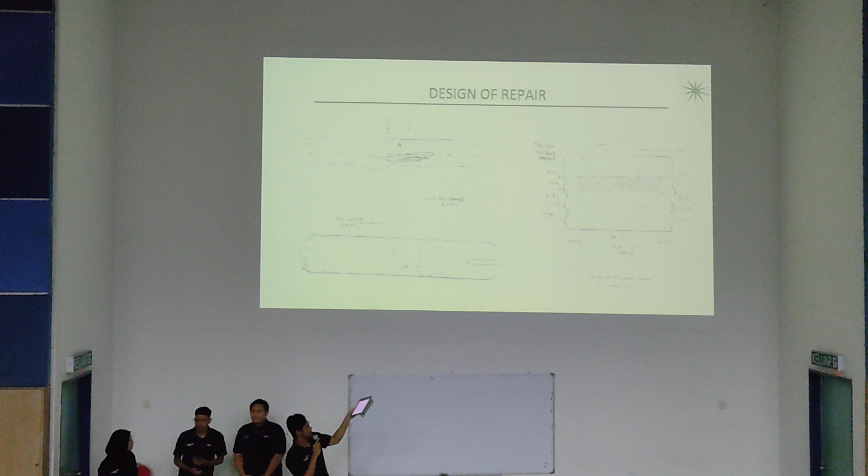Okay, this is the design of repair for the patch for the skin that we have removed. This is the local view and global view, and that's the location for the hole that we will cover. Okay, next.

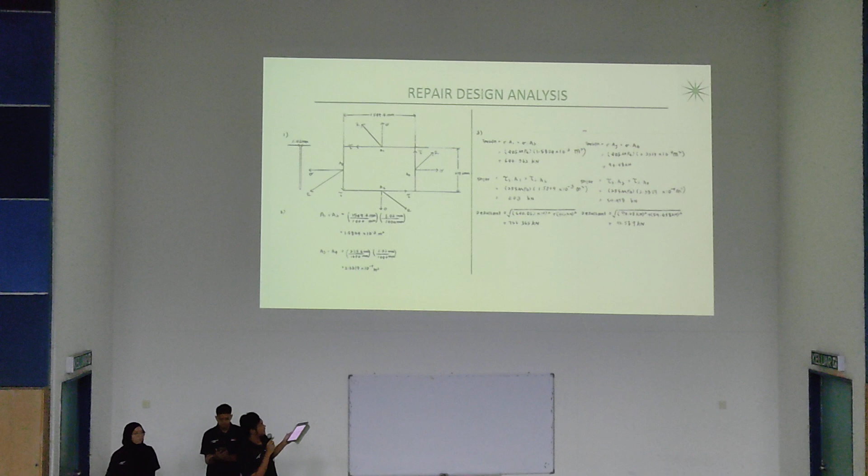This is the dimension for the hole that we will patch up, and this is the calculation for the load loss. As we see, there are 4 areas, and the length and width for A1 and A2 are the length times the thickness, and for A3 and A4 it is the width times the thickness of the skin, which is 1 millimeter. Then when we come up with the area for A1 to A4, we will multiply with the FTU and the FSU. Okay, next.

This is the calculation for our doubler strength for A1 and A2. We calculate the length minus the rivet diameter. We try to make it 80 per row for the test, using the rule of thumb from 1.0 for the skin, and the doubler is 1.2 millimeter for the thickness of the doubler. After we calculate the area for the doubler at A1, A2, A3 and A4, we multiply by the FTU and the FSU. After that, we come up with the resultant force for the doubler strength.

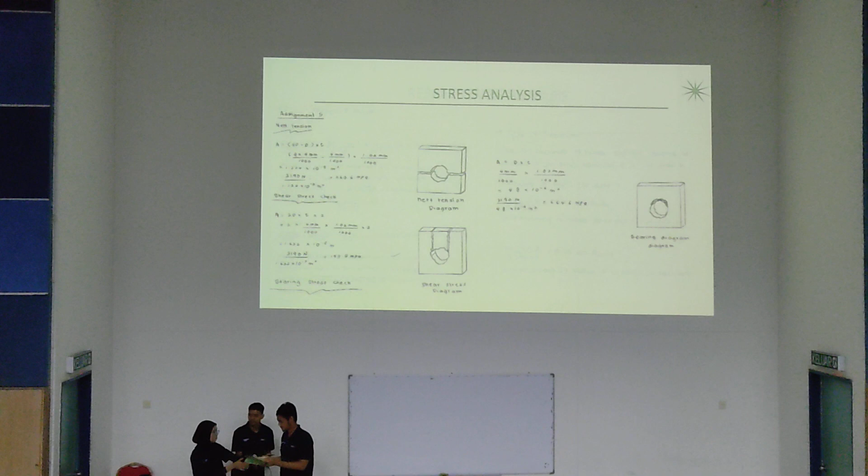Bismillah. Okay, I will continue the presentation about stress analysis. In this session we find 3 things: tension, shear stress check, and bearing stress check.

The key point for this session is we want to find out how much stress we can apply to our component or material. For net tension, we must refer to our rivet diameter, which is 4 mm, and we take the value 3190 Newton. So we will divide by our shear area that we are looking for. Okay, so we find the value of net tension, which is 260.6 megapascal.

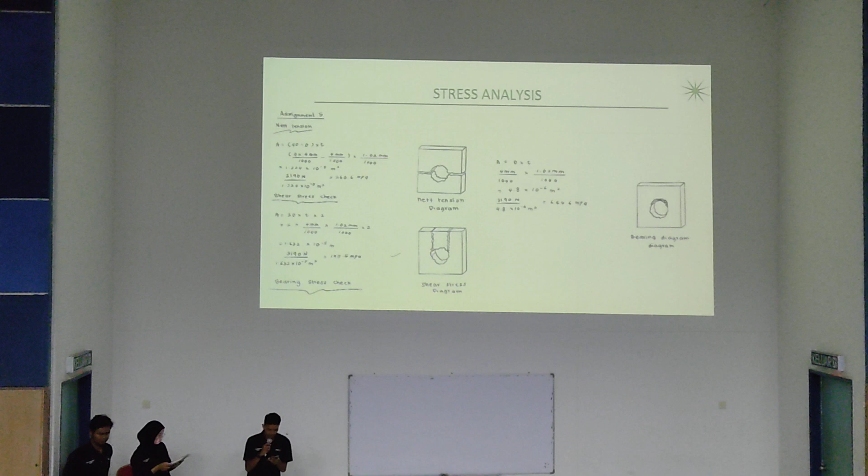Shear stress check value is 195.5 megapascal, and bearing stress check is 664.6 megapascal. Okay, next, for stress summary, we want to find the margin of safety for each analysis.

For shear out, we find the margin of safety is 1.3. So the shear out margin of safety of 1.3 indicates that the structure or component has a reasonable safety margin because the value is more than 1.

Furthermore, for net tension the value is also more than 1, which is 1.6, so the structure component is designed with a significant safety factor against tensile failure. Last but not least, bearing is 1.1. Even though this is the lowest value, it's still more than 1, so the factor of safety is good.

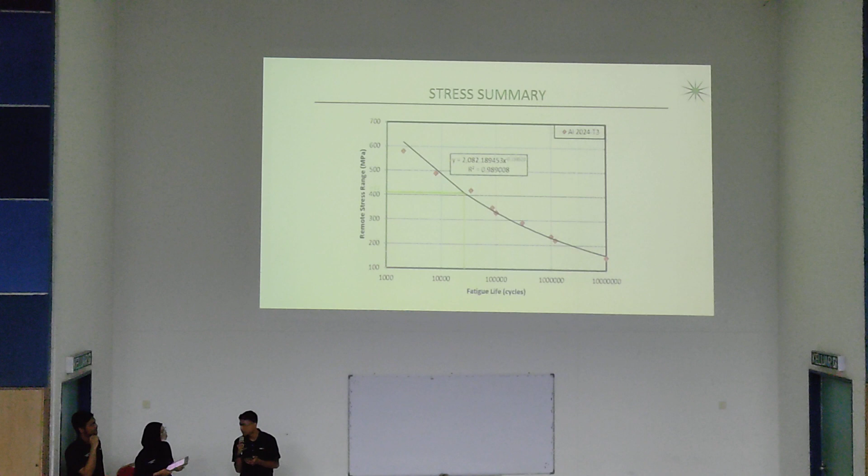Okay, next, for the graph of fatigue life cycles, we refer to the table of thickness at 405 megapascal, and we draw a vertical line on the x-axis, and we find the value of fatigue life cycle, which is around 20,000. Okay, next.

Okay, so I will continue the presentation, which will be the repair instruction. The repair instruction consists of 4 steps: inspection, remove damage, fabricate repair materials, and the last one is installation.

So basically, during the inspection, we would do a very detailed visual inspection to assess the extent of the damage. After that, we will conduct non-destructive testing, such as ultrasonic or eddy current inspection, to detect hidden or subsurface damage.

For the second step, remove damage, the extent of the damage was determined according to the guideline in the general repair section. The damaged section of the aircraft was cut off to ensure a clean and precise cut, and all sharp edges and burrs around the cuts were removed to ensure a smooth surface.

The third step will be fabricate repair materials. So the most important thing when fabricating the repair materials is that they must be 100% the same as the original materials. So if we are using alloy 2024 aluminum, we must fabricate the same material for the doubler. So next.

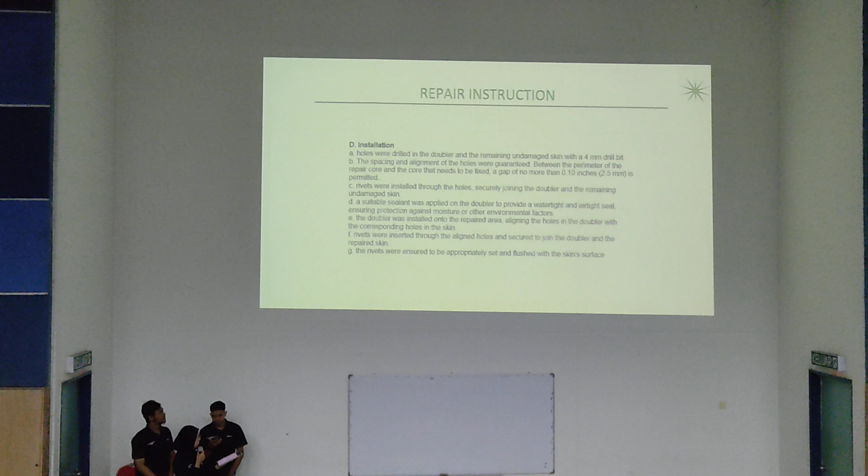For the installation, first the holes were drilled in the doubler and the remaining undamaged skin with a 4mm drill bit. After the holes were drilled, we will allow spacing and alignment between the perimeter of the repair core and the core that needs to be fixed, with a gap no more than 0.1 inches. After that we will install rivets.

To securely join the doubler, we will apply sealant to provide a watertight and airtight seal. After the doubler was installed, we aligned the holes in the doubler with corresponding holes in the skin. Rivets were inserted through the aligned holes and securely joined the doubler and repair skin. Last but not least, the rivets were ensured to be appropriately set and flush with the skin surface.

So the last one would be the certifications of personnel. Each personnel was assigned their own tasks. For example, Zul Hakim will carry out detailed visual inspection and design the doubler, and I will do the installation of fillers and doublers, while Aslam would calculate the suitable thickness and fabricate repair materials, and lastly Fakrullah would do the installation of rivets and make calculations.

I think that's all for my group. Thank you.

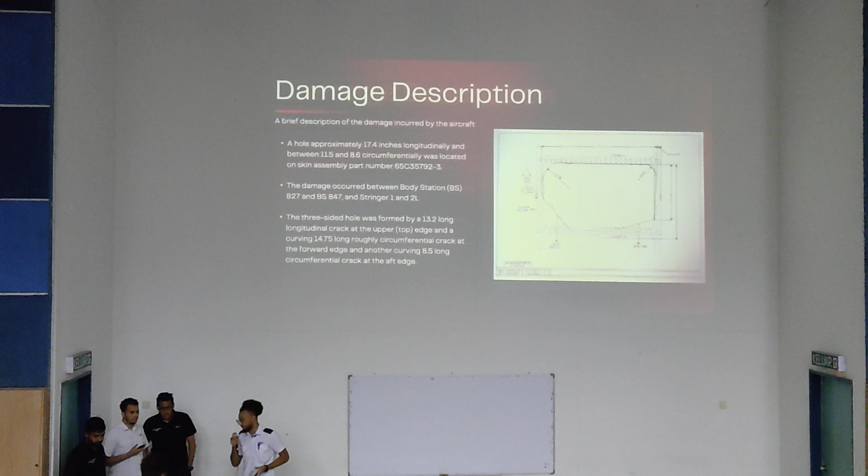My name is Anas, and today I will talk about the design repair. We will estimate this as the skin of the aircraft, and this rectangular shape we use for the cutting, and after the cutting we will install the doubler fit.

First of all we need to determine the material specification. For the material specification we will use aluminum 2024-T3, and we will use the same material for the doubler.

After finding the material specification, we need to find the material allowable values. We need to determine the area for each side. We have 4 sides. Our thickness for the skin was 0.9 millimeter, so according to the manual, we need to use the doubler at 1 millimeter thickness.

After finding the material allowable values, we need to find the skin area. To find the skin area, we take the length multiplied by the thickness. We need to determine the area for all 4 parts, and then we need to find the tension load loss.

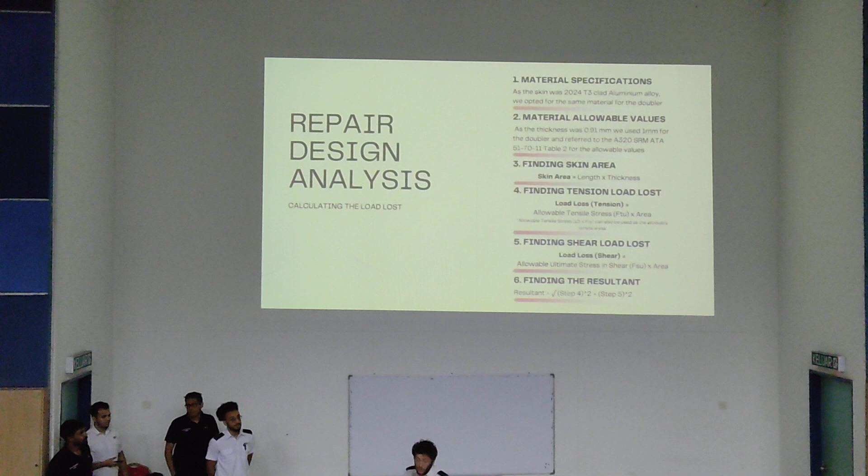In order to find the tension load loss, we use the allowable tensile stress multiplied by the area. We refer to the table for aluminum 2024 and found the FTU equivalent to 400 megapascal, which we used to calculate the tension load loss. Next we find the shear load loss using the same table for the ultimate shear stress FSU multiplied by the area. Then we find the resultant force, and since we have 4 areas, we multiply it by 2.

All the calculations were mentioned in our report, which we will show you after we finish this presentation.

Next slide, please. After this, we need to calculate the number of rivets used. By referring to the table, we decided to use the MS20470DD rivet, which is 4 millimeters in thickness.

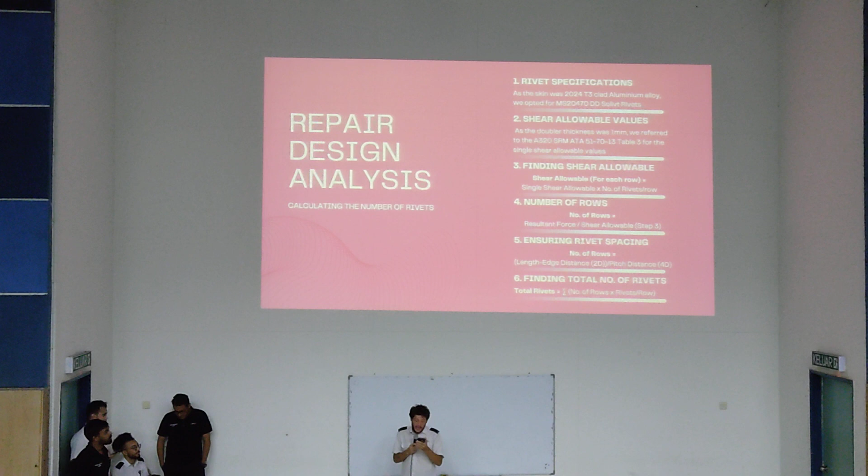After that, we need to find the shear allowable value, which is the single shear allowable multiplied by the number of rivets. To find the shear allowable, we referred to the rivet specification, and our shear allowable value for each rivet was 3190 Newton, multiplied by the number of rows, with each number of rivets per row equivalent to 3. After that, we need to find the number of rows and the rivet spacing.

After that, we need to stick the rivet on the doubler, so we need to find the doubler strength.

Next slide, please. In order to find the doubler strength, we follow this rule to find the material allowable value, find the skin, and find the area for the doubler, which is the length multiplied by the thickness. We need to find the tension load loss, the shear load loss, and the resultant, same as the skin.

After we find the doubler strength and the load loss, we need to calculate the margin of safety. Next slide, please.

The margin of safety is equivalent to the doubler strength over the load loss. Our first calculation found that if we use the same material as the skin, the margin of safety will be equivalent to 0.845, which is less - meaning the load cannot be transferred through the doubler, and it's not safe. That's why we need to make another calculation using a different material, which is AISI.

We did the same calculation for the stainless steel AISI and found the margin of safety equivalent to 1.54, which is safe to fly according to the manual. That's all for my part. I would like to pass to my colleague to explain more about this part.

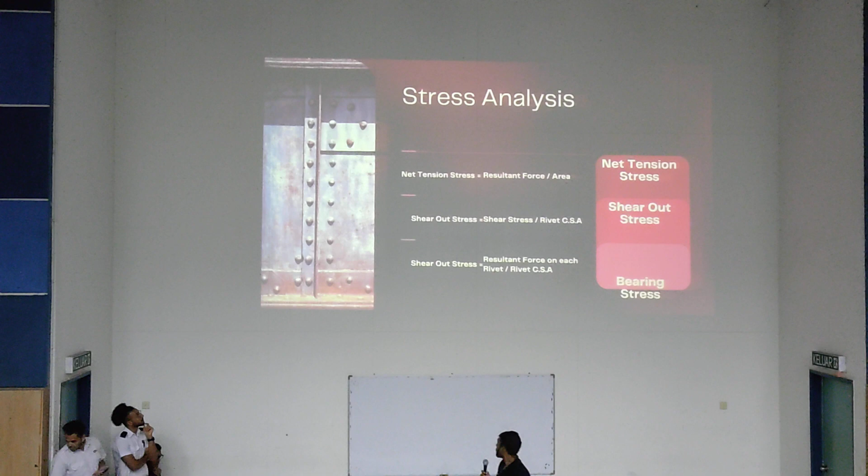Here are the values we got from our stress analysis. As you can see, the shear out and net tension stress are in reasonable margins of safety. However, the net tension stress is a bit lower than the recommended industry amount.

When it comes to bearing stress, it's only 1.09, which is not suitable, as any abnormal loads on the rivets would cause them to shear. So we believe the factor of safety is not complied with in the bearing stress nor the net tension stress. Next slide - I'll pass on to my friend for this part.

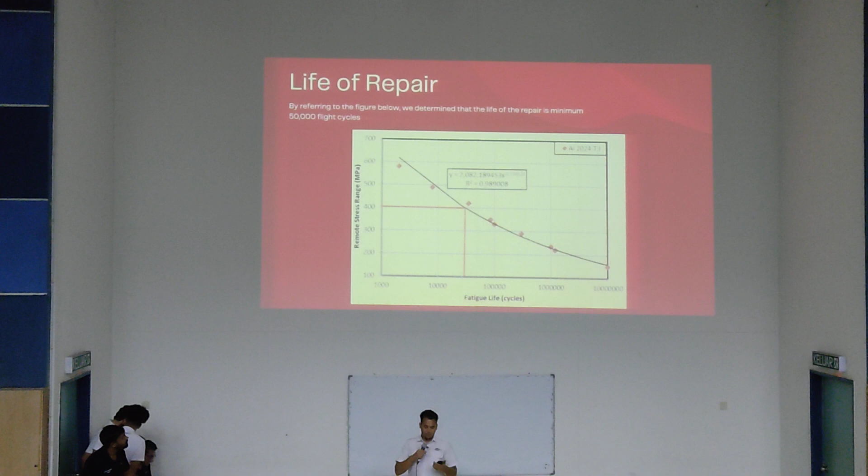In this part, we need to determine the possible lifetime or fatigue life. We have this graph showing the relation between stress and fatigue life. First, the maximum stress will be 400 megapascal, determined by the material table we used. From the graph, it is determined that the fatigue life cycle is 50,000 cycles. Thank you, I will pass to my friend.

Assalamu alaikum. Now we have inspection of the damage area. First, visual inspection: we check the area around the damaged areas for any signs of corrosion, cracks, deformation, or other types of damage. Second, marking defects: if any notable defects were found, we mark the area.

NDT inspection: once the part is removed, we send it for high magnification optical viewing to gain a better scope of the damage caused to the area and its vicinity. Fourth, measuring damage scope: the damaged part is measured and a sketch is made to determine the size of the cut on the damaged area.

Next, removing the damaged part area. Cleaning damaged area: before conducting removal of the damaged area, we clean the area around it of dust or other contaminants. Determine cut type: we opted to go for a rectangular cut of 24 by 14 on the damaged area.

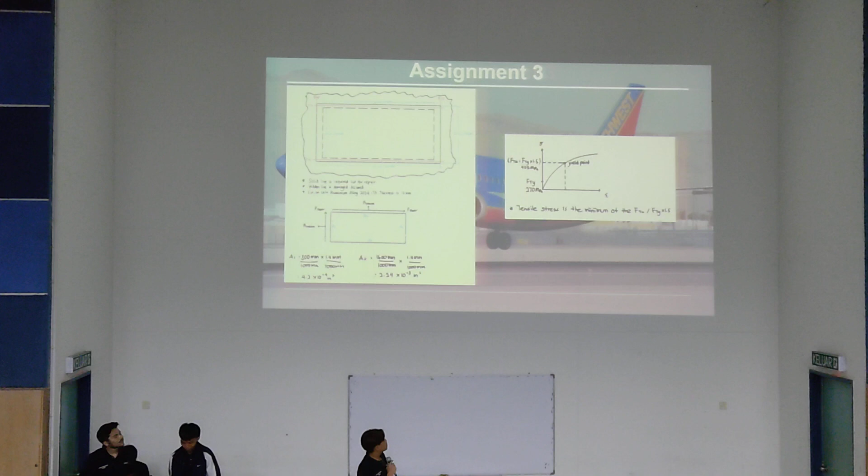Okay, next we need to find load carrying capacity loss. The reason we need to find it is to know the doubler, how much load the doubler we need to make at that part. So the formula is F equal to sigma A.

So we substitute, first we need to find tension. We substitute tension 405 times by 4.2, 10 to the power of -4.

Then we find the shear, and then we find the resultant for the area A1 and A2. After that we do the same at area A3 and A4. So from this load carrying capacity loss, we can make a doubler.

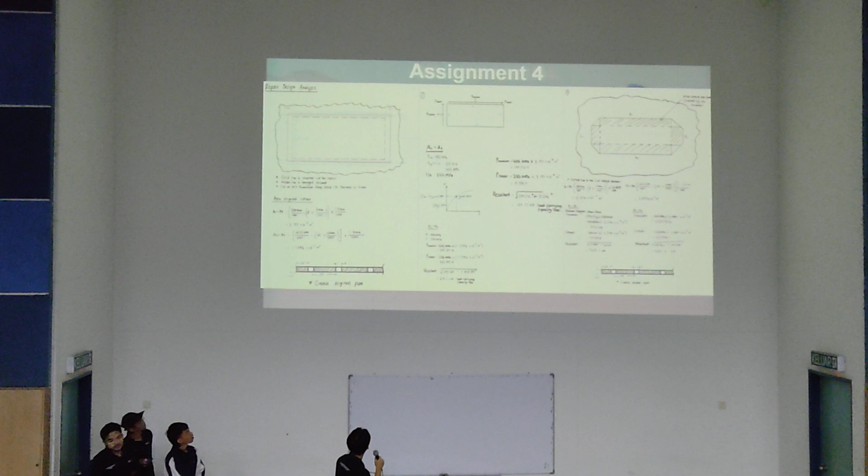Okay, so stress analysis is to analyze the rivets, how much force is needed for this kind of damage to occur.

So there are three stresses: net section tension, shear out, and bearing. For net section tension we get 169.83 megapascal. For shear out we get 76.14 megapascal, and for bearing we get 304.6 megapascal.

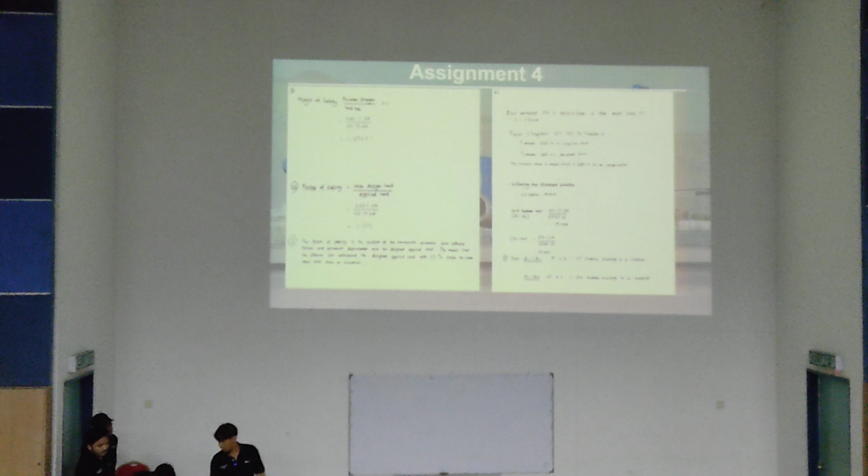And then the next is the material. We can refer to item number 4 in the report, which states that the material of the skin is aluminium alloy 2024.

And last is the proof of strength, which can be found in the stress analysis that has been searched by Shahmi in the report. Next, I'll pass to Ahmad Arman.

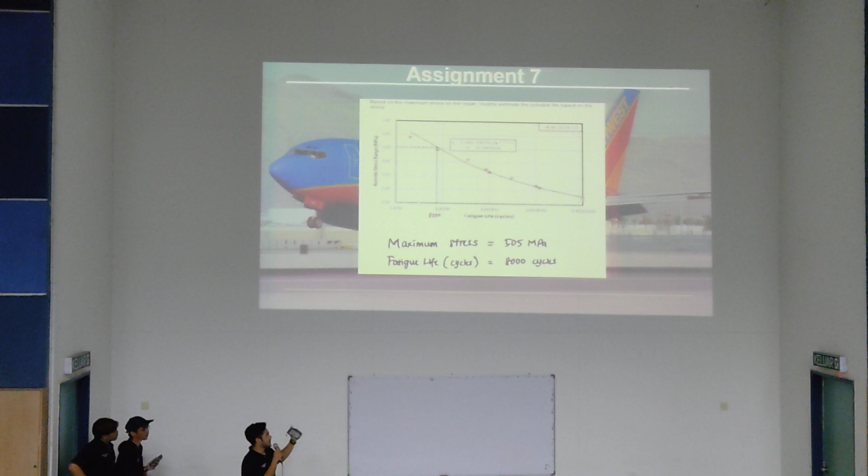Okay, as we can see in this graph, our maximum stress is 505 megapascal. So we found that our fatigue life cycle is 8,000 cycles. This indicates that the material can endure a repetitive stress ranging from the minimum to the highest, which is 505 megapascal. Approximately, it can undergo 8,000 cycles more until its failure.

This stress summary indicates whether our skin can withstand the stress or not. First we find shear out. As we calculate the shear out stress, we get 3.35, which is above 1, so our skin can withstand the shear out.

The second one is net tension. As we calculate, it's found to be 2.38, which is more than 1, so it can withstand the tension failure.

And the last one is bearing stress. We calculated that the bearing stress is 1.66, which is more than 1, so it can withstand the bearing failure. I think that's all for me, I pass it to...

For assignment 9, we need to repair the damage. Here there are 4 steps to repair the damage.

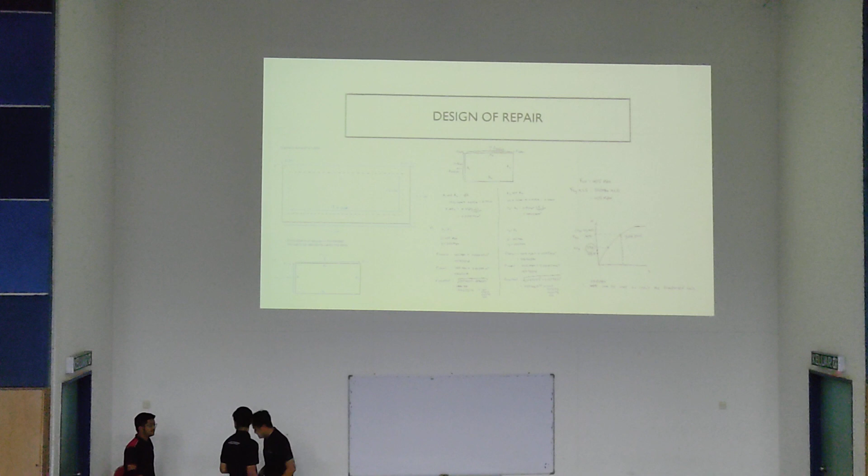Bismillahirrahmanirrahim. Assalamualaikum and a very good evening to everyone. So, on the left side of the PowerPoint slide is the damage of the aircraft, where the hidden line represents the damage and the solid line represents the cut that we have made for the repair.

The dimension of the damage is 11.5 inches by 17.4 inches, and our repair is bigger than that, which is 15.5 inches by 21.4 inches.

On the middle part of the slide, we want to find the load carrying capacity that is lost. From table 2 of A320 SRM ETA 51-70-11, we get the tensile and shear values, which are 405 MPa and 255 MPa.

Based on those numbers, we want to find the tension, shear and resultant, where the resultant is the amount of load carrying capacity that is lost. To get the resultant, we combine the tension and shear, which is the square root of tension squared plus shear squared. That is for A1 and A3. The next step is to repeat the same process for A2 and A4.

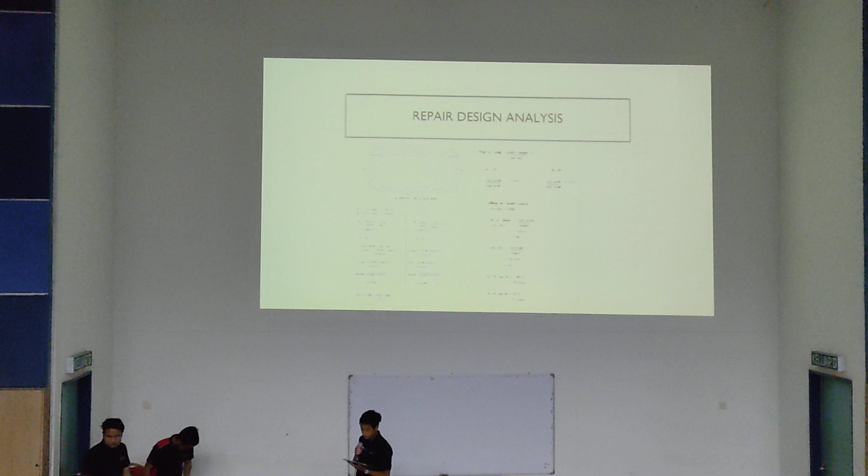So by following the standard practice of 3 times 3,660, we get the amount of rivets. Now for number of fastener is 300.93 kilonewton divided by 10,980 newton, so we get 28. Now for A2 and A4 is 416.56 kilonewton divided by 10,980 newton, so we get 37.

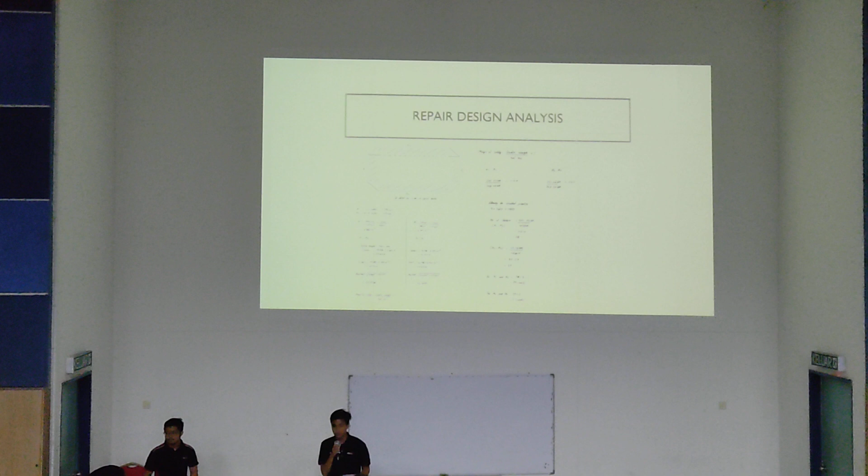To determine the amount of rivets required, we take those two answers and times by 3. So for example, A1 and A3 is 28 times 3, so we get 84 rivets. And for A2 and A4 is 37 times 3, so we get 111 rivets.

Now I pass the mic to Ivan Zikri for the next slide.

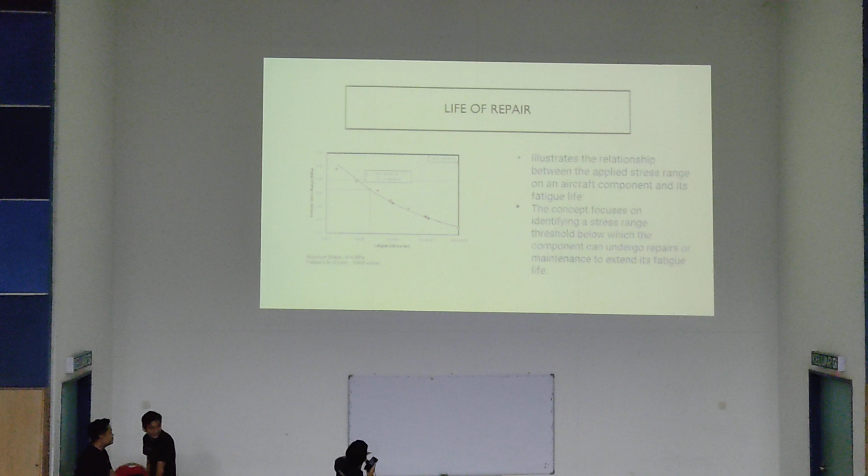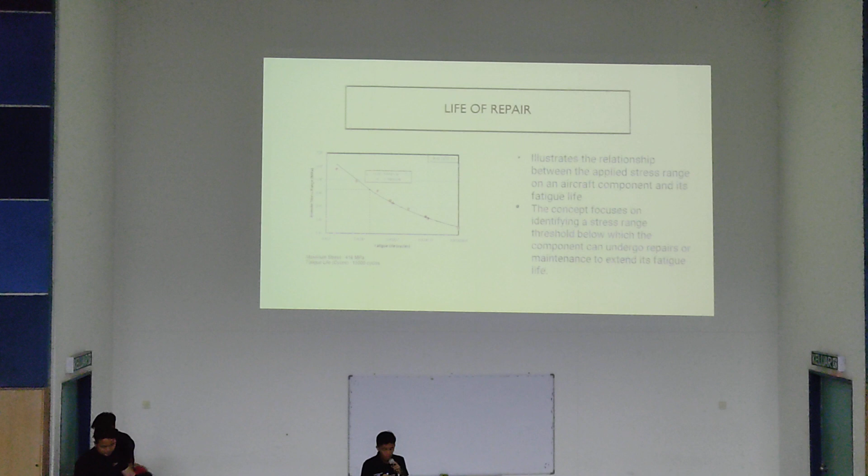On the graph, you can see the remote stress range versus the fatigue life cycle. This illustrates the stress on the aircraft and the fatigue life cycle, presenting data on stress from a certain part of the aircraft. Life of repair focuses on the stress range threshold of a component that can undergo repair and maintenance to extend its fatigue life. By analyzing this graph, one can determine the critical stress of a certain part, which can maximize the operational lifespan of the aircraft. As you can see, the maximum stress of the part is 416 megapascal, and the effective life cycle is 1,500,000 cycles.

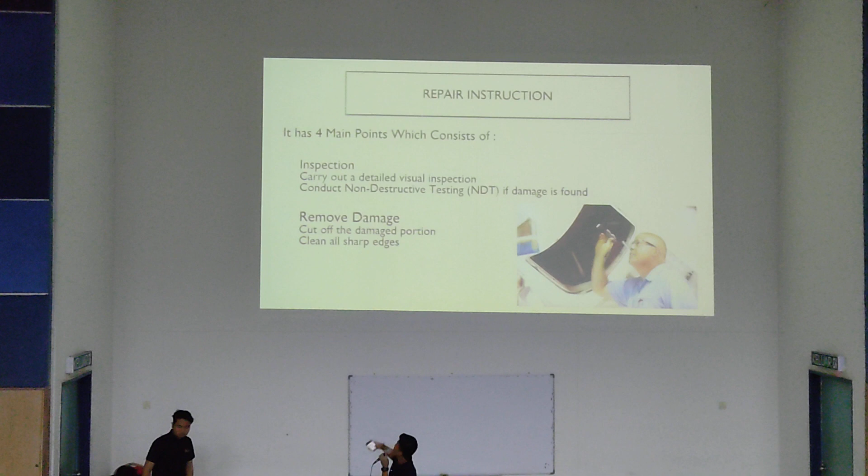Then moving on to the next point: remove the damage. First, we have to cut off the damaged portion using the correct tools, making sure the cut is clean. After cutting the damaged portion, we have to clean all the sharp edges using files or sandpaper to smoothen the edges. Next.

Alright, on the third point, fabricate repair materials. We have 2 steps. First, we have to prepare the fiberglass filler material, following the steps provided by the manufacturer and using appropriate protection like gloves or goggles when handling the filler material.

For the part of fabricate the doubler, we have to determine the size, shape, and material for the doubler based on the structural design and repair specifications.

The last one is about installation. Installation has 4 parts: drill holes of the appropriate size, install rivet or the fastener, apply sealant on the doubler, and install the doubler.

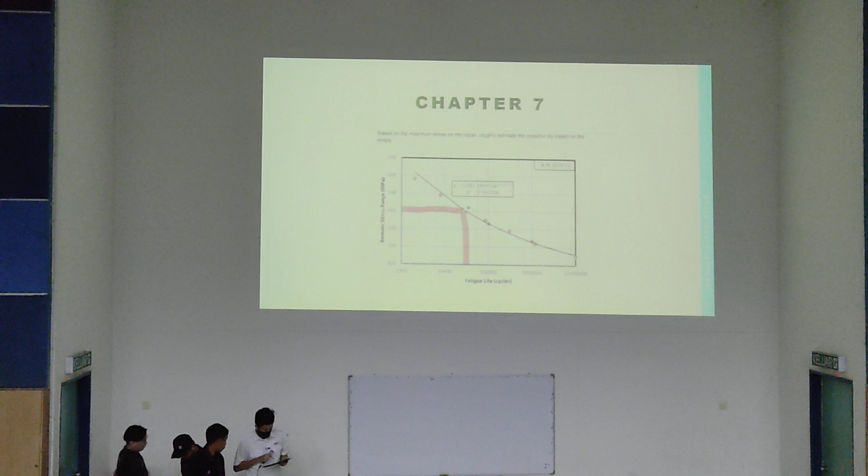Okay, next. For the next part, this is based on the maximum stress of repair and roughly estimating possible life based on stress. We got this from our calculation first, and then next.

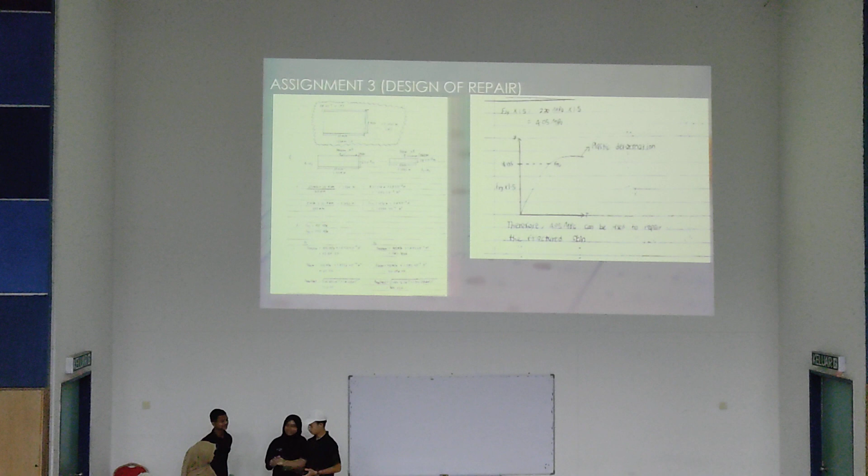Okay, next is design of repair. For our case, the damage dimension is 60 inch in length and 8 inch in width. So the first step, we calculate the area. The first area we calculate is the front view which is the length, and the second one is the width, which is 8 inch, and then we get the area.

The first area is 1.2192 times 10 to the power of negative 3 meter square, and the second one is 1.6256 times 10 to the power of negative 4 meter square. And then the second step, we calculate the force.

We use the formula which is stress times area, which is the area we calculated from the first step. The stress we derive by referring to the table in the maintenance manual, which is based on the thickness of the skin. For our case, the thickness of the skin is 0.8 millimetre, and therefore the FTU is 405 megapascal, and FSU is 255 megapascal. And then we calculate the resultant force.

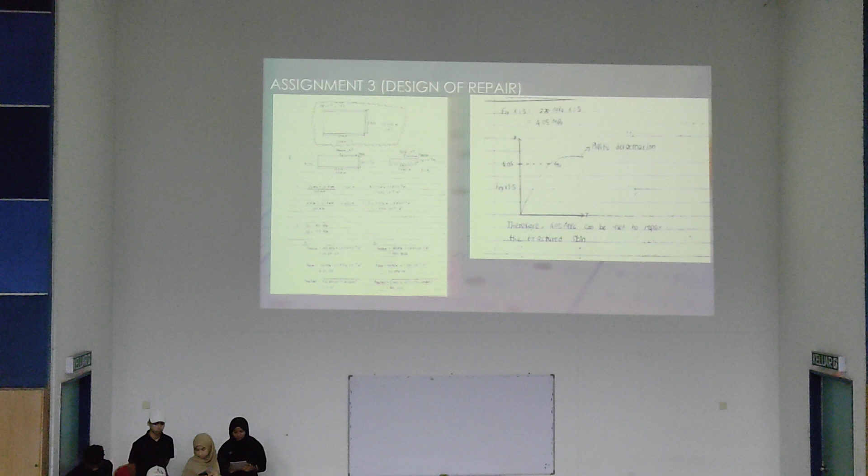Okay, for the graph, it is a deformation graph, where we can know the maximum load that the skin can withstand. Okay, next I will pass to Farah.

Sorry, I will pass to Wafiq.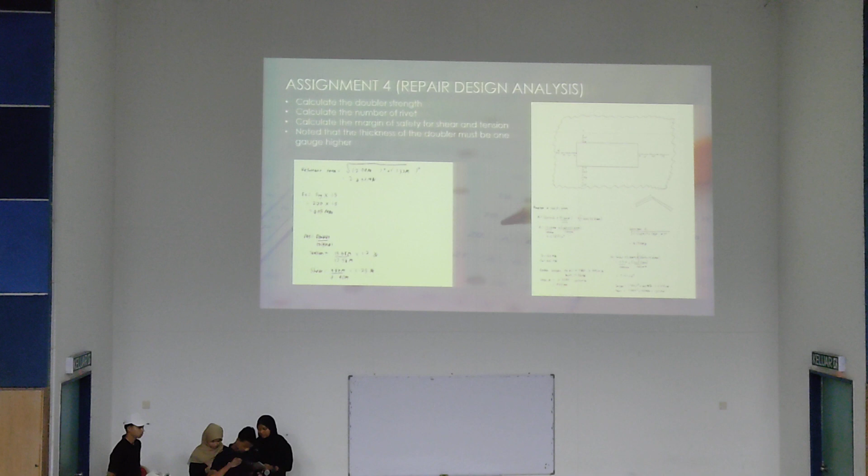So for assignment 4, which is repair design analysis, due to some possible calculation errors, I will just explain the steps we did. Firstly, we calculate the doubler strength. Doubler strength is quite similar to the load loss calculation, but the difference is we use a thickness one gauge higher than the skin thickness.

And then we calculate the number of rivets, based on the rule of thumb: one row needs 3 rivets. So the force of the rivet will be multiplied by 3, and then the resultant force of the load loss will be divided by the fastener strength. And then we calculate the margin of safety for shear and tension strength.

Okay, for the thickness of the doubler, that one is 1 gauge higher. Next slide, sorry.

Okay, for assignment 5, we calculate the tensile force, shear out force, bearing stress, and fastener shear. Here, first we calculate the area of the section for tensile. And then for shear we calculate the shear area, where we need to add 2 times the diameter. And then for bearing stress we calculate the bearing area, and for fastener shear we calculate the cross-sectional area of the rivet.

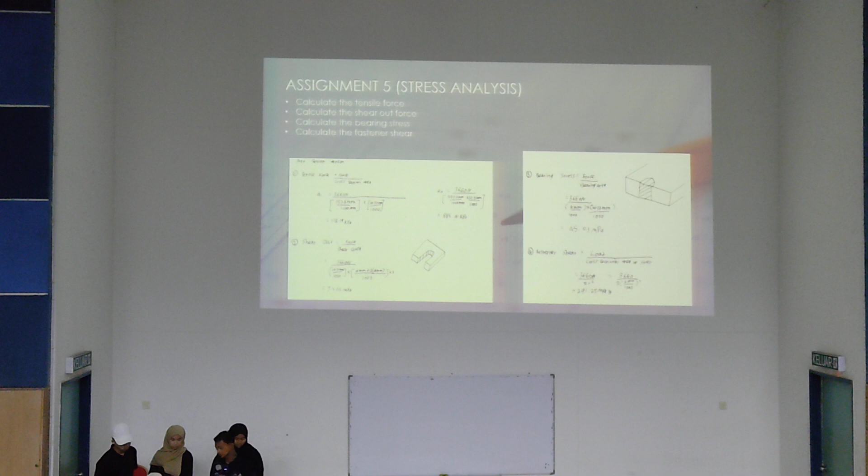So for the next, I will pass to another presenter.

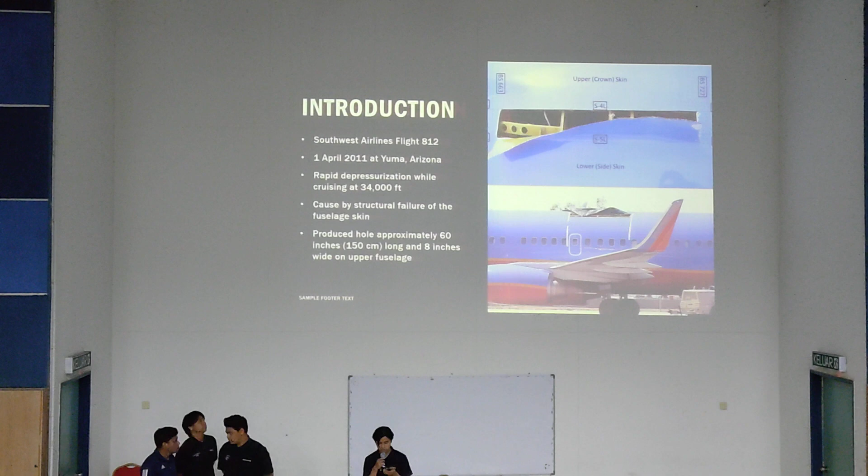Next, what we do is the damage report on the damage. In this report we put the aircraft data, the component data, and how we found the damage. Then the detail of the damage: how big is the damage, the size of the damage, and the cause of the damage.

Next, we provide the letter to Boeing for approval of the repair recommendations. Okay, next I will pass to my other team members.

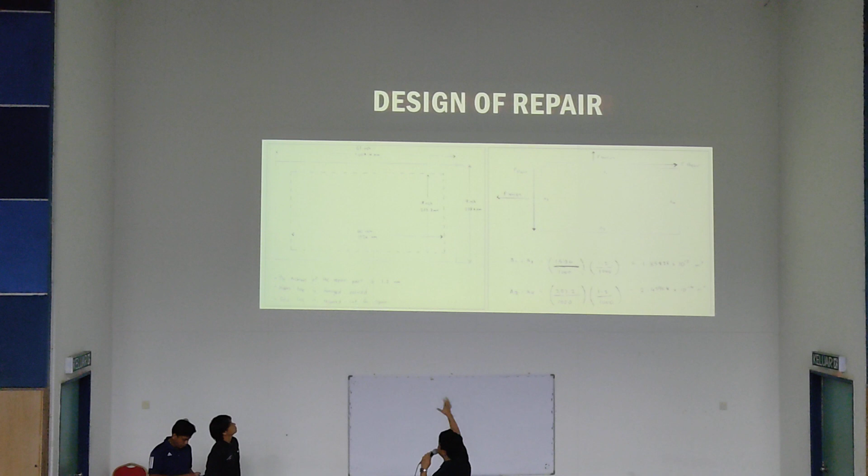After we've done a few reports on our aircraft, we proceed with our report analysis on how it looks. So this is the design of our repair. You can see here all the dimensions and all the areas.

Then we have analyzed everything. This is a rough calculation that we're going to make to put in our report. This is the resultant and anything related to the material. The analysis we're going to put in our report is in the image slide here.

It's the basics about the doubler strength, the margin of safety, the load loss, the shear, and so on. Next is going to be about the stress analysis.

The stress analysis is about the net tension, shear out, bearing, so that at least the manufacturer will know roughly the idea of what our team wants from them. That's all from me. Thank you.

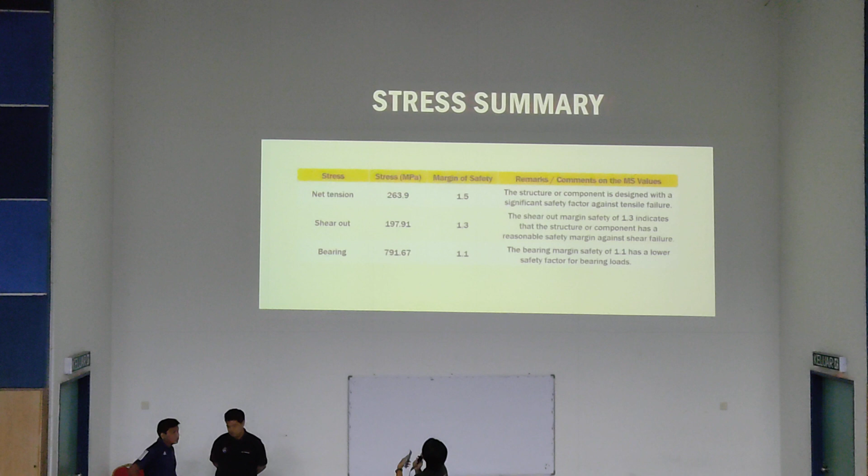Next is bearing: 791.67, which gives a margin of safety of 1.1.

Assalamualaikum warahmatullahi wabarakatuh. I will present about inspection. The inspection has 4 steps.

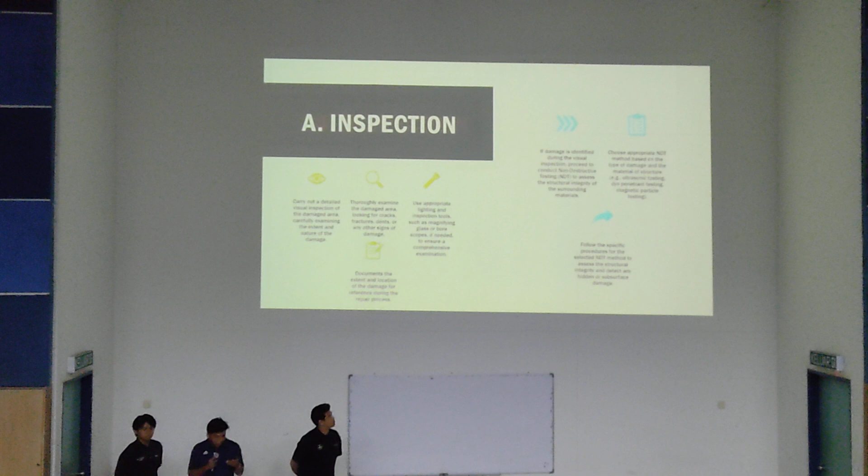The first inspection is to carry out a detailed visual check to find a crack or other sign of damage. The second step is to do NDT testing, choosing the appropriate NDT method based on the material of the structure.

Then we have remove damage. Remove damage means cutting off the damaged portion using an appropriate cutting tool to ensure it's clean and smooth, to facilitate proper bonding of the repair material.

Then we clean all sharp edges resulting from the removal process, finally getting a smooth edge using a file, sandpaper, or any deburring tool.

Next, the fabricate repair material: we fabricate a filler material that matches the composition and structural properties of the original materials, then follow the instructions provided for mixing the filler material.

Then we create a doubler material that will be installed over the repair area. We determine the size, shape, and material required, cut and shape the doubler using an appropriate cutting tool, then smooth the edges and surface of the doubler.

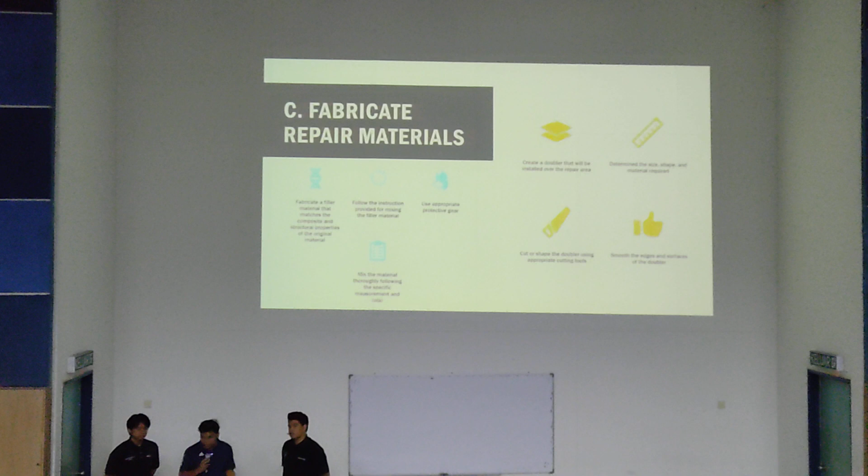The installation step: make a hole using a drill with the size matching the fastener. Position the drill accurately to create holes on the doubler and structure.

Then install the rivet and fastener using the appropriate riveting or fastening technique, following the manufacturer guideline or AMM to determine the required installation torque or force.

After that, apply the suitable sealant using a brush or spatula, then install the doubler. Position the doubler aligned with the existing structure, press it firmly into the surface, then verify the doubler is properly aligned and secure.

I think that is all from us. So this is the end of our report.

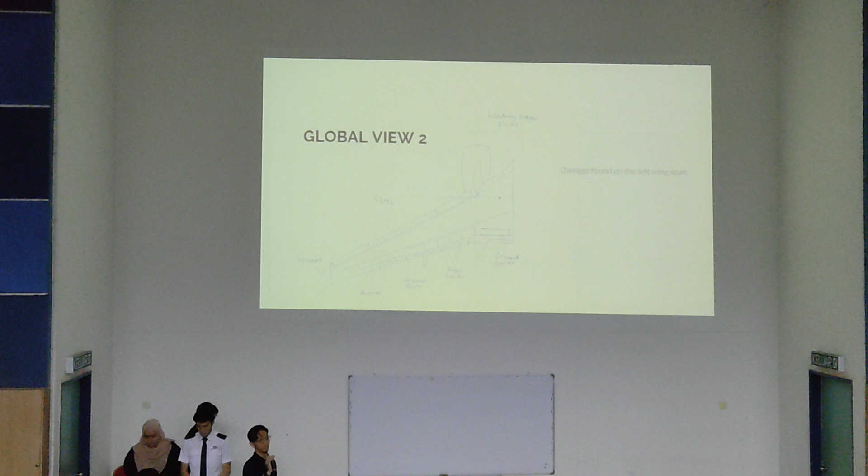And the other global view, yes, this one is the damage found on the left wing side. Yes, so this one is the local view of the damage.

Okay, so this one is the detailed dimensioning of the damage, around 20 in diameter of the holes. So yeah, that's the damage we found on the left side of the wing.

Alright, so next is the damage report. In the damage report, we include all the information that we found on the defect at the aircraft, like the dimension, the stringer line, and so on. So we file the report and send it.

Okay, so we file the report and the LAE sends the report to the manufacturer to acquire authorization of the report so that they can release the task card for the LAE, so the repair can be done.

So, okay, this is our report. So go on. Okay, so this is the letter that we send to the manufacturer.

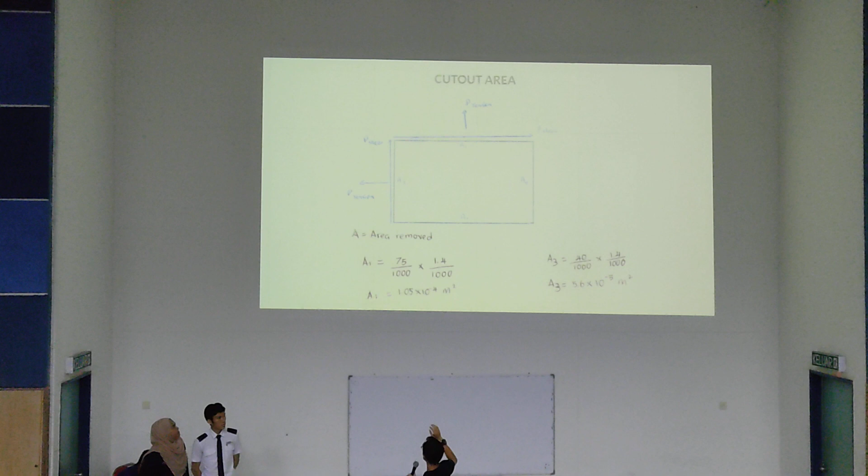Okay, next is the cut out area and load loss calculation. So the cut out area is this. The hidden damage line is the damage that occurred. This is the damage area that we cut out from the skin. So this is the area that we remove. Specific area, area 1 is 1.05, and that's the area.

Okay, next, the load loss that we found on our skin, we searched on tension and shear. So the resultant force is 5.025 times 10 power 4 Newton, and the other one is 2.680 times 10 power 4 Newton. So yeah, alright.

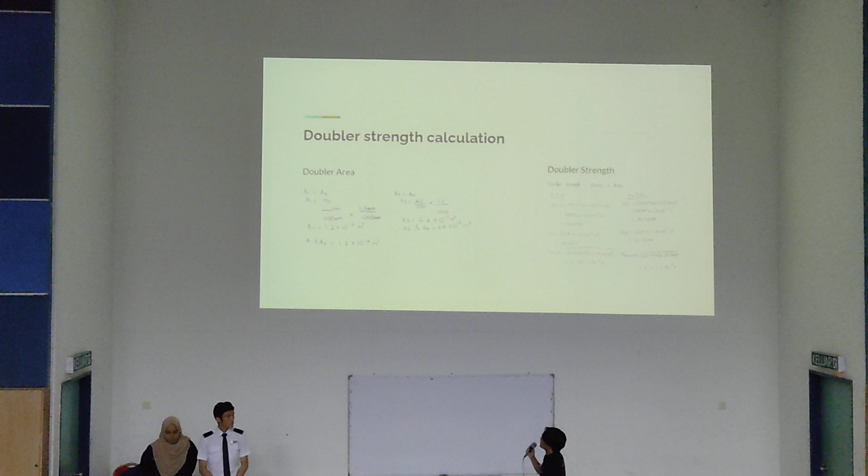After we determine the area, we need to find the doubler strength. The formula is simple: stress times area. The stress is the FTU value and FTY value from the SIM table, and we determine which to be used. To use the FTU and FTY, we need to determine the lowest number, so we need to be conservative. Those are the doubler strength that we found initially.

It is higher than the load loss, so next we need to determine the margin of safety. The margin of safety is simply the expression of the reserve factor minus 1. Reserve factor is the doubler strength over load loss, minus 1, which should be greater than 0. To find the margin of safety, we divide the doubler strength we found with the load loss we found, minus 1, and we got 0.143, which is more than enough.

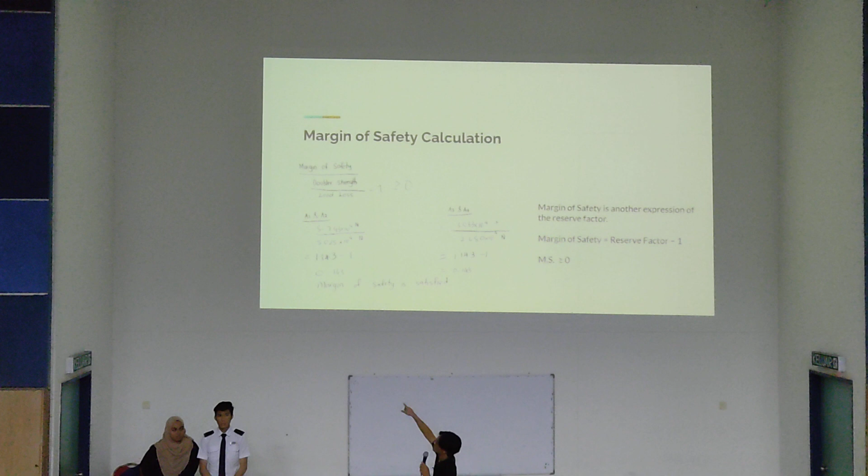For the factor of safety, since the original doubler we calculated is not enough to achieve the factor of safety of 1.5, we calculated with a different doubler. First we used the doubler with material of aluminium alloy, thickness 1.6, the next gauge. It doesn't achieve 1.5. It is also true for aluminium alloy with thickness 1.8. Therefore we use a doubler of different material, which is stainless steel.

First we used the thickness of 1.6. It did achieve the factor of safety, but it is too high. Therefore we use the thickness of stainless steel that is the same as the doubler, the same as the skin, which is 1.4, and it did achieve the factor of safety of 1.9.

So why did we do this? Aluminium alloy can achieve the factor of safety above 1.5, however it will be too thick, which may cause problems in the future during operation. Therefore we use stainless steel. As discussed, the reason we use stainless steel with thickness 1.4 is because 1.6 has a factor of safety that is too much higher.

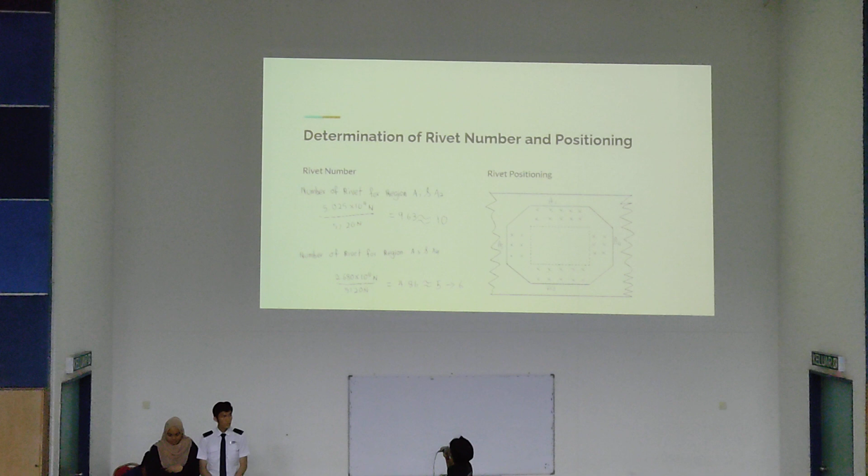Next, determination of the rivet number and positioning. To determine the number of rivets required, we need to divide the load loss over the strength of the individual rivet. From the calculation, for area 1 and area 2 we found we need at least 10. For area 3 and area 4, we need at least 6.

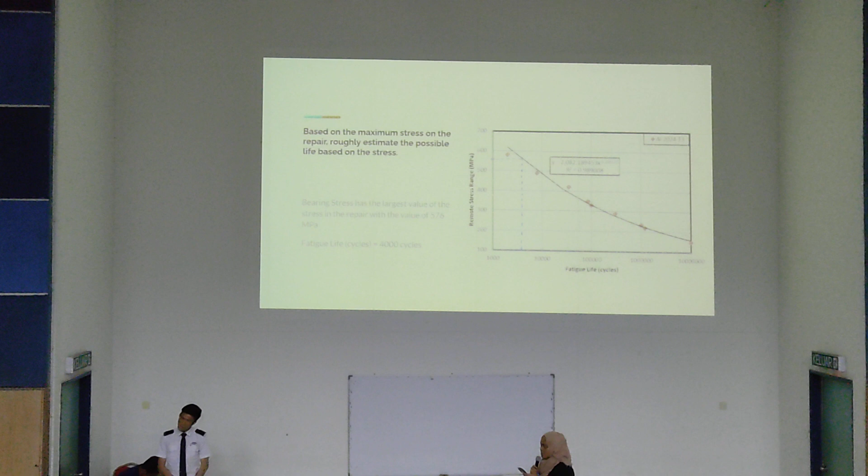We take the value from bearing stress to identify the life cycle estimation, because bearing stress has the largest value of stress, with a value of 576 megapascal. After plotting, we get 4,000 fatigue life cycles.

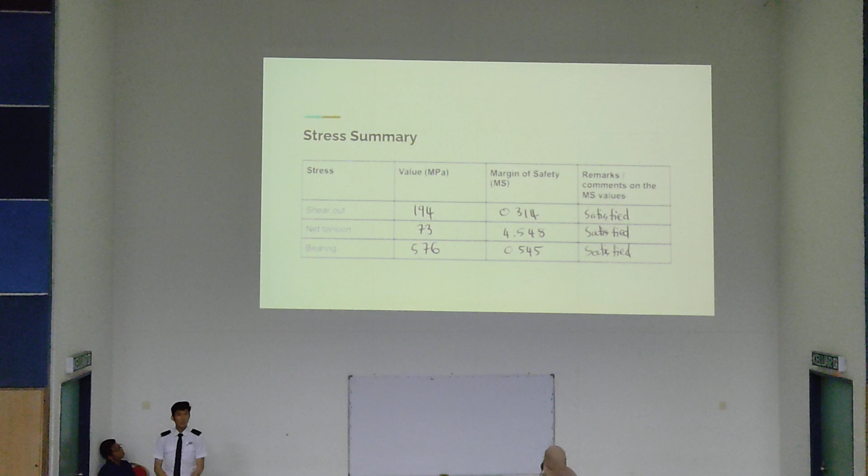For stress summary, all of these values are from previous calculation. Since all the margin stress is above zero, we can remark the margin of safety as satisfied.

After you have all the numbers and details, next you do the actual procedure. First, you inspect the damaged area for cracks or anything. You can use a magnifying glass or special instrument, and if there is a crack, you further check it using NDT.

After that, once you know there is a crack, you need to remove the damage. You cut it off, then clean all the edges, making sure there are no burrs or sharp edges.

After that, if the damage requires a filler material, you fabricate the fiberglass filler material, then fabricate the doubler. You get the dimensions just calculated, then you cut it out, and you're ready.

After that, you install it. You put the doubler there, drill all the holes, install the rivets, and check. After you're done, you check it one last time to make sure everything is correct, and you're done. Thank you.

Thank you, very good, really very good.

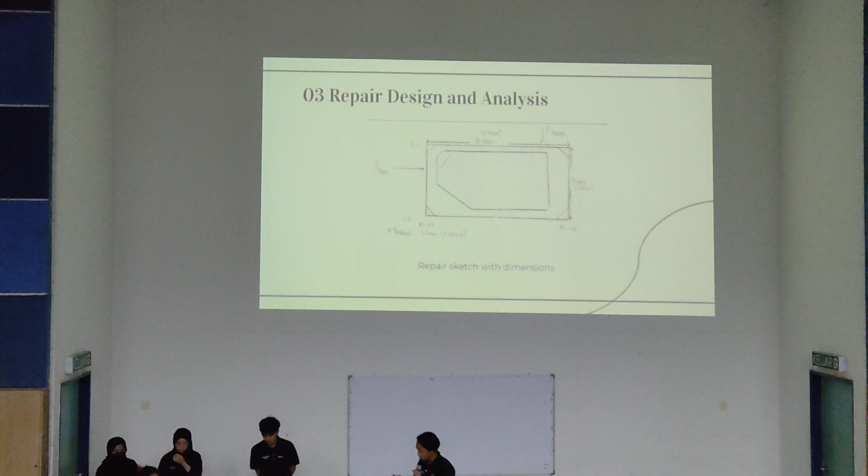First, this is the calculation of the cross section area. You have to divide it into two areas: first is length times thickness, and the second is width times thickness. After that, make a calculation of the load loss due to the damage. You need to find the force tension, force shear, and force resultant on both areas, area 1 and area 2.

Next is doubler strength. First, calculation of the doubler strength on the original and doubler. Original first section length times thickness, and then you need to find the tension max and shear max on the original and doubler area.

Next is calculation of the margin of safety, which is margin of safety equal to reserve factor minus 1, and the reserve factor you need allowable load over applied load, and from that you can find the reserve factor.

Next, for factor of safety is 1.5. This is because based on the aircraft structural manual in aircraft design, the factor of safety is stated as 1.5. Besides that, the factor of safety can be found using the formula, which is ultimate load equal to 1.5 times limit load. Therefore, the rivet that was selected in this repair is universal head rivet.

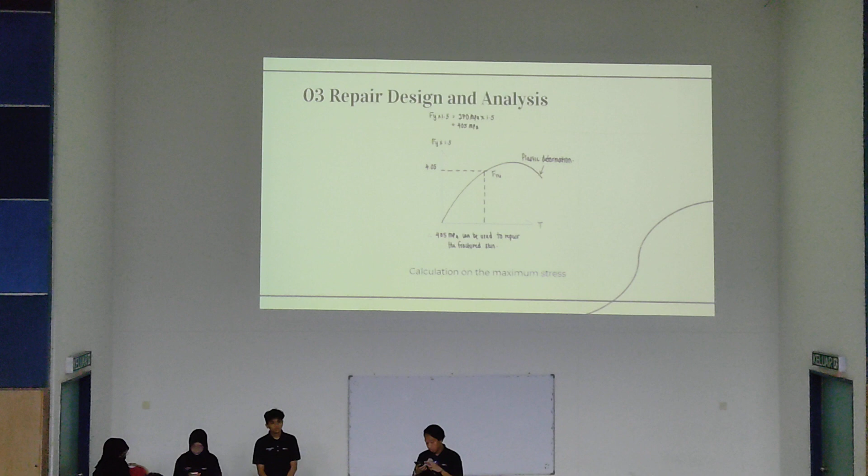Next is stress check calculation. For the stress check calculation, you need to consider 4 things, which is net tension, shear out, bearing stress, and fastener shear.

That's all from me, so I will pass to the next presenter.

Assalamualaikum, okay so I will be presenting on life of repair. So this is the graph between the skin's maximum stress and its maximum fatigue life cycle before it will undergo plastic deformation. So based on the graph, our repair fatigue life cycle, the maximum life is 400,000 cycles.

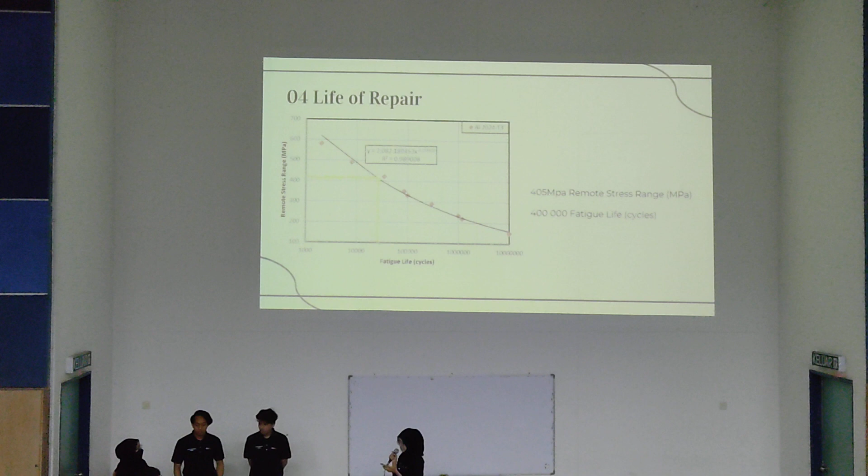Next, we calculate the margin of safety to define how much it can withstand before it reaches its breaking point. Based on all the calculations, our new skin is able to withstand all the stress that will act upon it, because the margin of safety is more than 1. So I will pass to the next presenter.

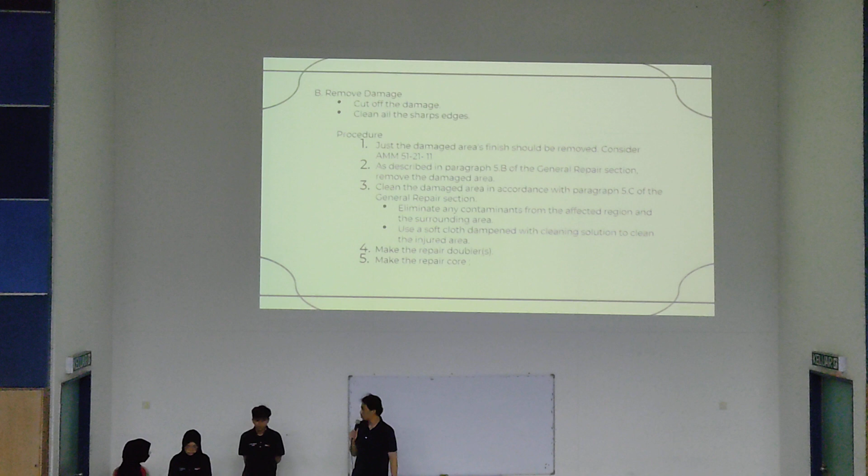Next is procedure C, which is fabricate filler and fabricate doubler. First, we need to make sure that the cell walls of the repair core are installed parallel to the initial core of the cell walls, and the maximum error permitted is 13 degrees.

For D, installation: drill hole size 4mm, then install rivets, apply sealant on the doubler and install the doubler. We need to use adhesive substance to adhere the repair doubler, then wrap the repair with polyester tape to prevent the doubler from shifting during the last stage of cure. Do not seal the edges of the panel, because if you seal the edges it can prevent the flow of the adhesive material and can disrupt the last step of the cure. Thank you.

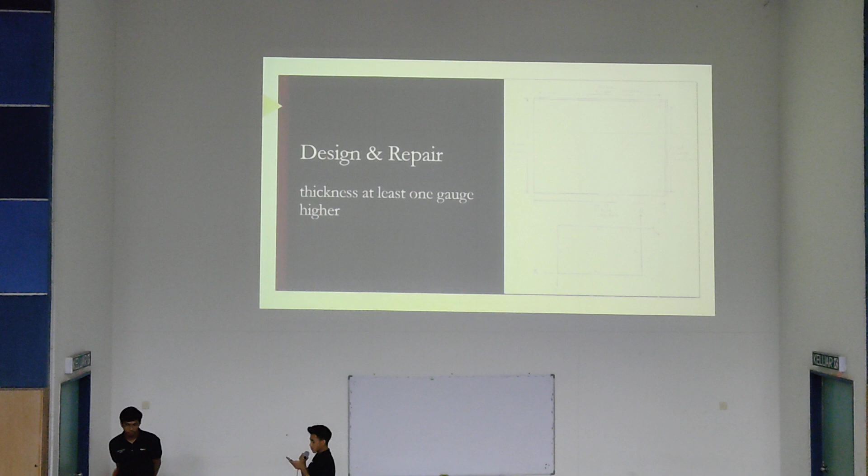For the design and repair, for the length of the doubler, we expanded the doubler from the rivet hole, which is 6 inches more than the hole, and 6 inches in length. So we move on to the next presenter.

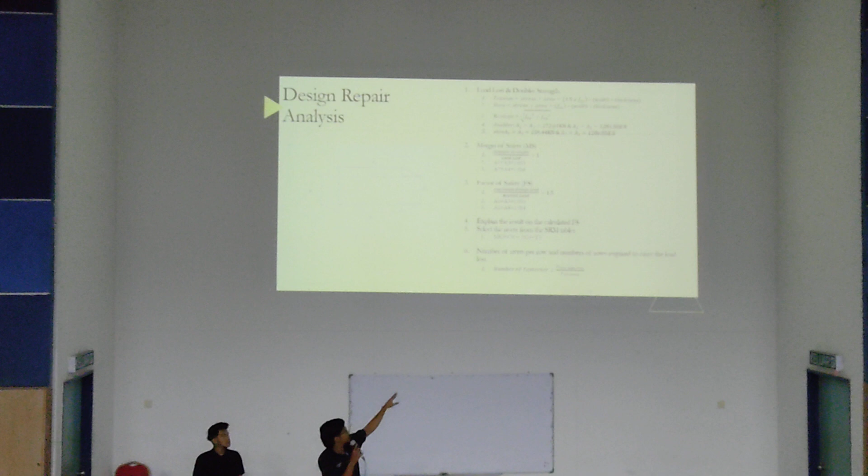For question 6, what I did was for one area, I found how many rows of rivets can be in one area. I found 18 rows in one area. Each row needs to have 3 rivets by using the formula for number of fasteners for each row.

After that, this is stress analysis, conducted on the rivet. We have net tension, shear out, and bearing. This stress only uses the formula F over area. The difference between these three is the area - for net tension the area is length minus diameter times thickness, while for shear out it is 2D times T times 2. We have to understand and think about this formula, not just remember it.

Okay, understand? Faham Afiq? Okay, that's the value we get. That's all from me sir, thank you sir. Group 12, sir.

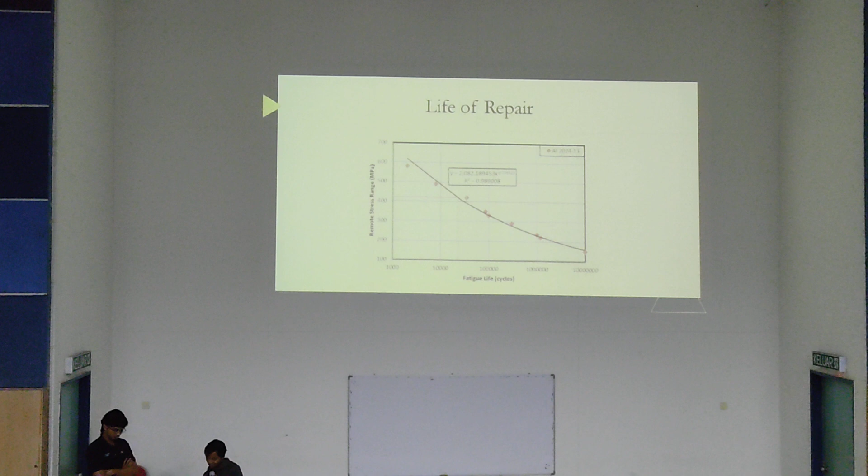Next, last but not least, repair instruction. For damage inspection, first we carry out a detailed visual inspection of the damage using appropriate tools. Then we examine the damage closely to determine the extent, severity, and any potential underlying issues. If the visual inspection reveals any concerns, or if the damage is in a critical area, consider conducting NDT.

Next is remove damage. First, use appropriate cutting tools to carefully remove the damaged area, and after removing it, carefully inspect the edges to identify any sharp or jagged areas.

Next, fabrication. Depending on the nature of the repair, prepare the filler material required to fill the void left by the removed damage. If the repair requires a patch or replacement part, fabricate it using suitable materials.

For installation, if necessary, drill holes and install the fastener at the drill holes. Apply an adhesive or bonding agent, then align the repair patch with the damaged area, taking care to position it accurately. Securely attach the repair patch to the component by tightening the fastener.

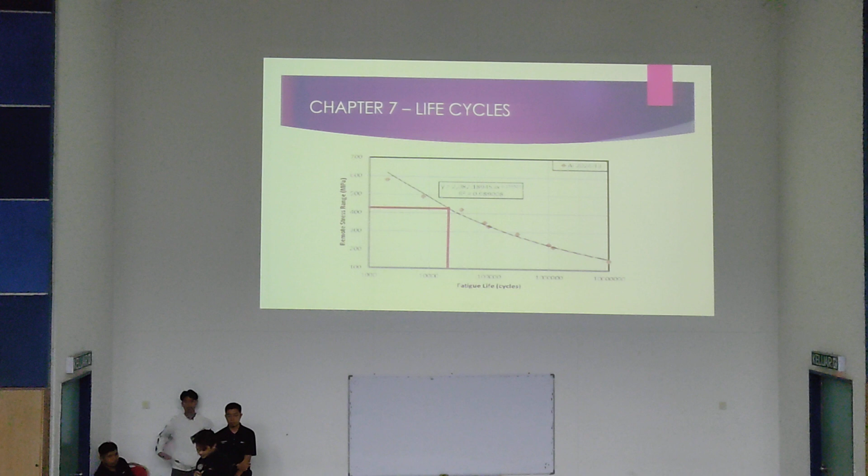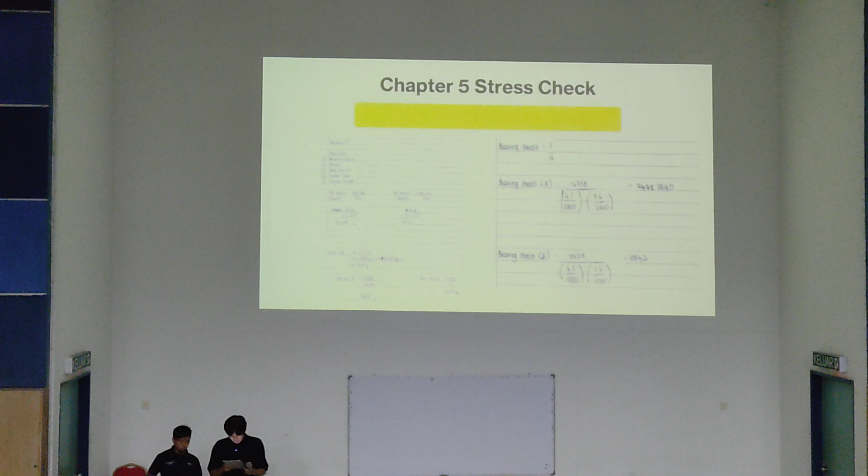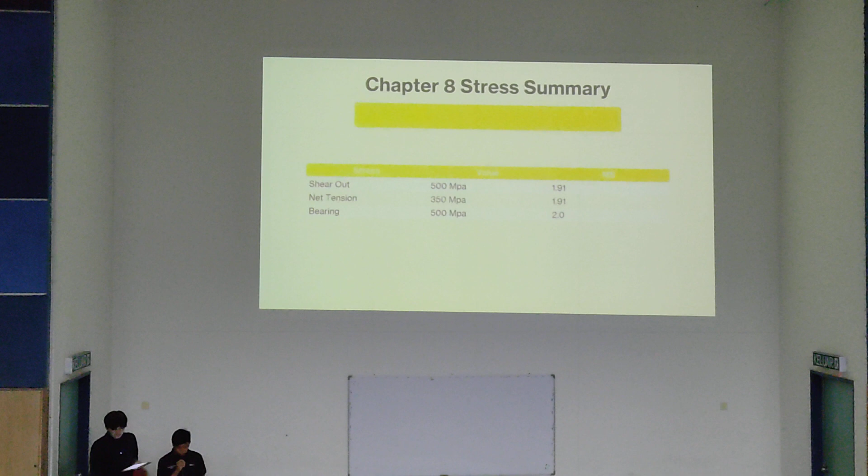So for the procedure of repairing damage, there are 4 procedures. The first procedure is inspection: we determine the extent of the damage, isolate the area, and use techniques to identify any hidden damage. The second procedure is removing the damage, where we remove the damaged component to ensure the surrounding area is unharmed.

The third step is to fabricate repair material, which may involve manufacturing replacement parts or constructing a patch using appropriate material. The last step is installation, where we prepare the manufactured component and fit it onto the aircraft, secured by personnel with specific certification. So I think that's all.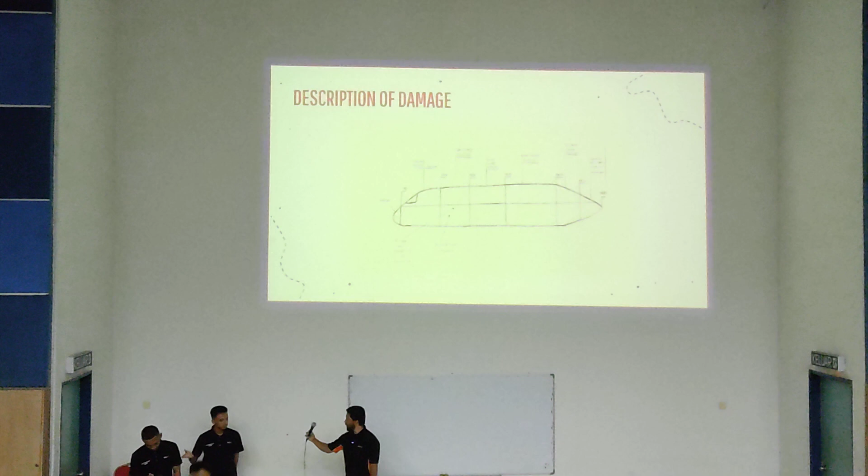Okay, continue. So we continue with the description of damage of this aircraft. Okay, so basically this is the global view of the aircraft. As you cannot see right now, but I will describe it: the position of the damage will be on the inner side of the fuselage.

That is in between the body section, 600 to 700.

So this is the local view for the stringer. One more thing for this aircraft: it will have two damages, one on the stringer and one on the skin of the aircraft.

So basically for the design repair, because we have two damages on the stringer, the first one, as you may not be able to see, I will describe it. For the stringer, it has a crack in the middle, so we are making a Z-shaped doubler to cover the part that we already cut.

Next, for the selection of rivet, we can find first the diameter of the rivet using the thickness of the cylinder. So we have the thickness of cylinder, which is 2.2, and we have the rivet diameter, which is 5.6 mm.

So for the second rivet, please.

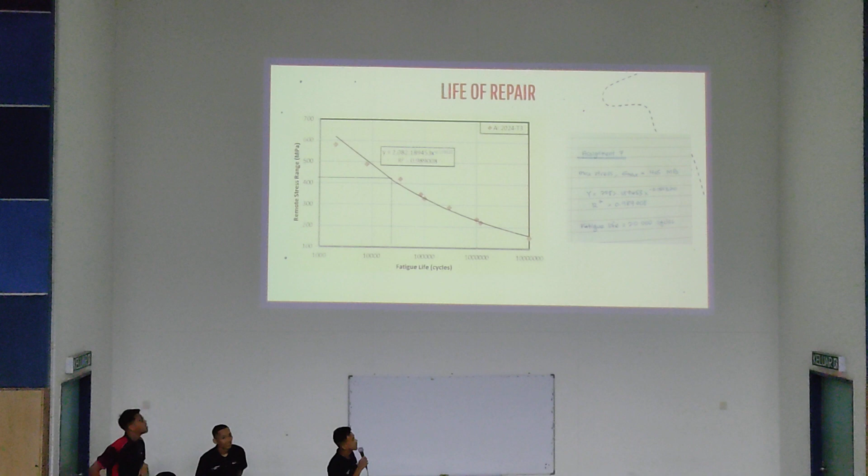Next is about structure repair. There are 4 steps for structure repair: first is inspection, second is remove damage, third is fabricate repair material, and installation.

For inspection, there are two ways. First, we carry out detailed visual inspections. Second, if damage is found, we conduct NDT. Basically for structure we conduct eddy currents, so for our damage we conduct eddy current.

For the stringer, next is remove damage. There are two steps: first we cut off the damage using a grinder or others, second we clean all sharp edges with files or sandpaper.

Next is fabricate repair material, which is filler or doubler.

Lastly, we install the doubler. First we drill the hole, second we install the repair, then we apply sealant, and lastly we apply the doubler. That's all, thank you.

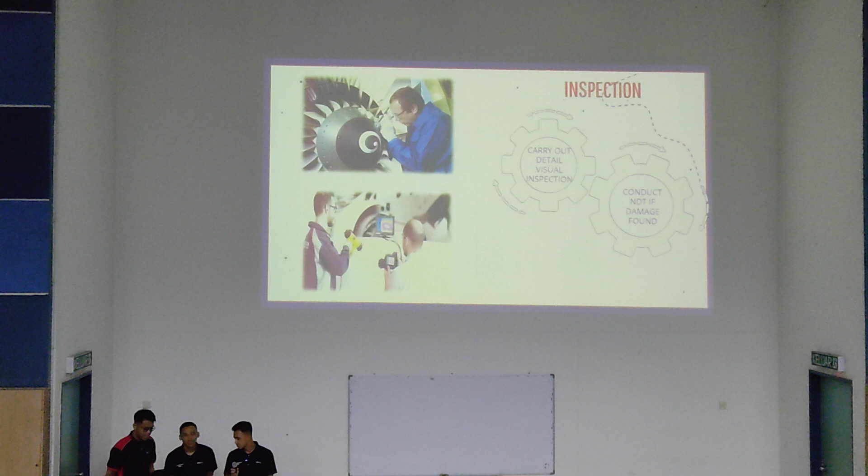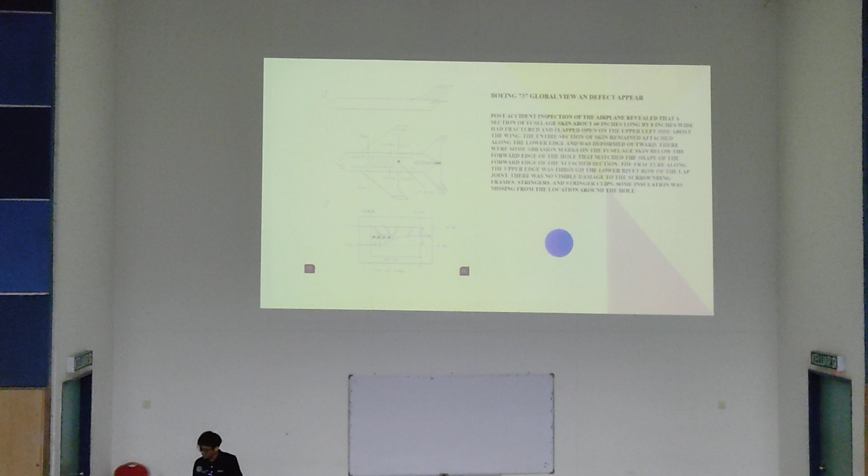This is assignment 3.

For the question A1, P tension we got 65.84, P shear we got 41.45, and for the resultant we got 77.8. For A2 we got the tension 493.78, and for the shear 310.896, and for the resultant 583.5.

So this is the plastic deformation. 405 MPa can be used to repair the fractured skin.

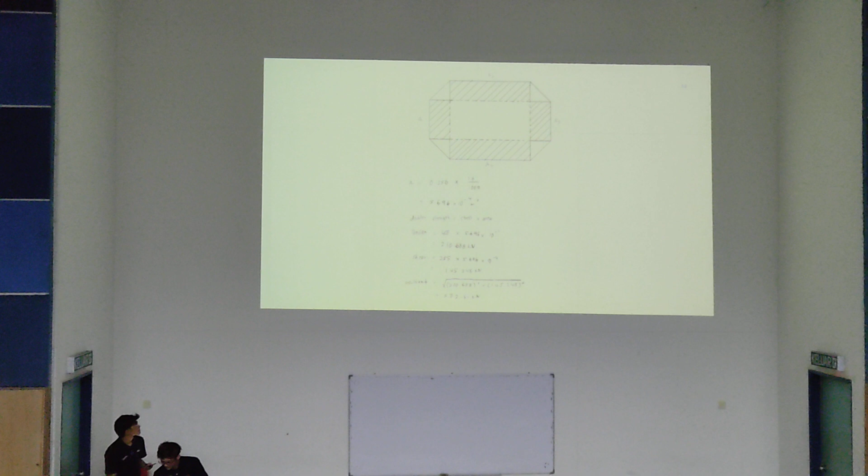So this one is the doubler strength calculation. The formula we use is stress times the area. So we got the tension is 230.688, and the shear 145.248, and the resultant is 272.61.

So this is assignment 5. The first one, we need to find the net tension. We use the formula force over area and got 9.3 MPa. The second one is we need to find shear out. We use force over area, and we got 169.92.

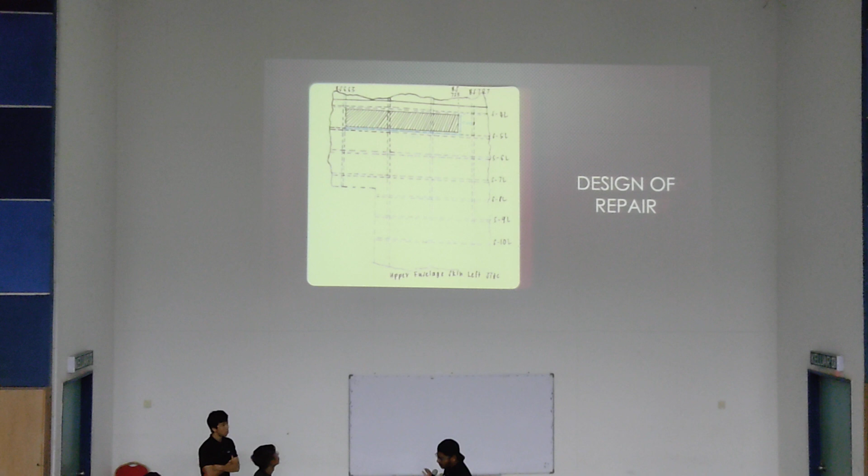Our group will be presenting for the Southwest Airline Flight 812, which had a fuselage skin structural collapse caused by a 60-inch hole on the upper fuselage. This is the design of the repair. The hole itself was between stringer 4L and 5L, and between body section 663 and body section 725.

For the right picture, as you can see, is regarding the cutout original parts. So there's a calculation here. For the section, we have 480 millimeter squared. For the tension is 194 kilonewton, and for the shear max is 122 kilonewtons. So we got the calculation is...

229.72 kilonewtons. So to repair the original parts, we need to have the calculation for the doubler repair. For the doubler repair, we have 960 millimeter squared. For tension is 388.8 kilonewton, for shear max is 244.8 kilonewton, and we got the resultant of 459.45 kilonewtons. Alright, moving on.

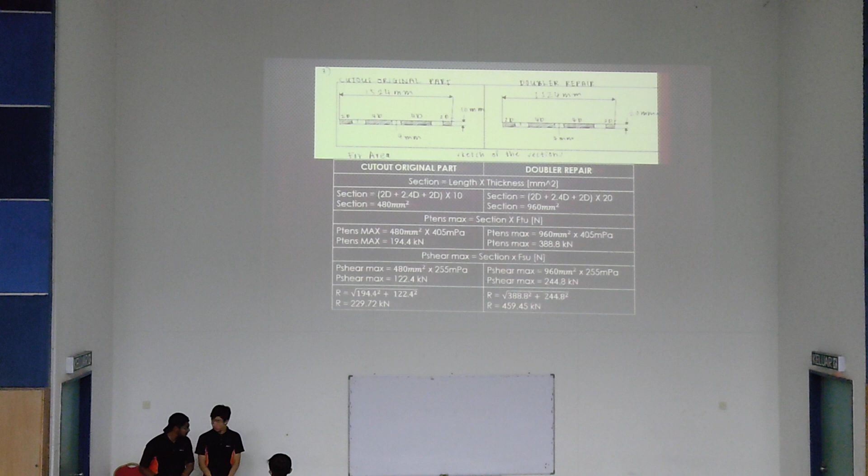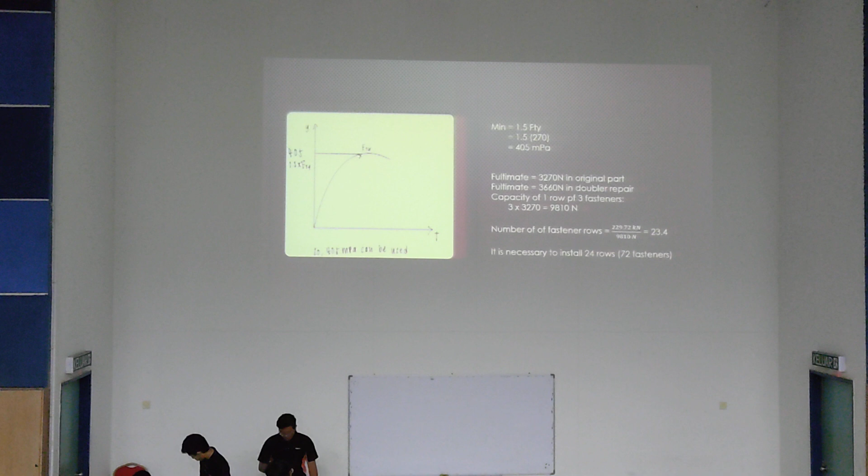For the minimum, we got 405 megapascal, and for both ultimates, the original part we have 3270 newton, and for the doubler repair we got 3660 newton. Because one row has 3 fasteners, we multiply by 3 for the original parts, so we got 9810. And we need to divide it for the original with the original parts, so we got 23.4. We need to round it, so we got 24 rows, which we need 72 fasteners.

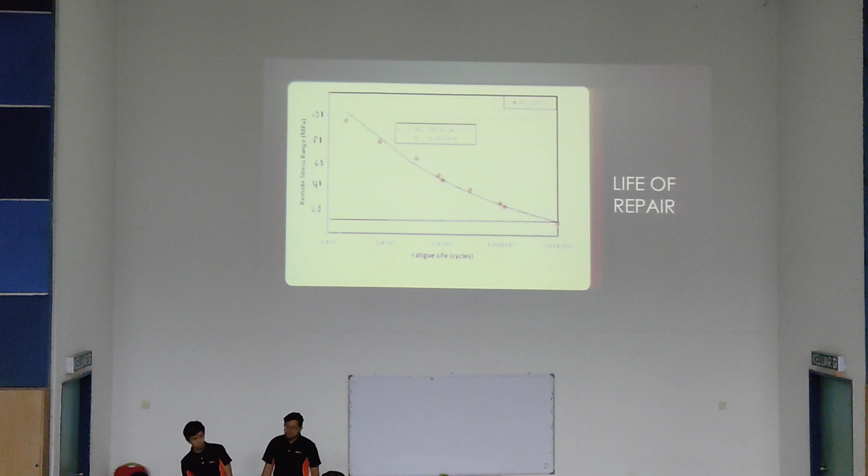Lastly, this is only an estimation for life of repair, as you can see from the graph. Next, I give to Iqbal.

Assalamualaikum, my name is Iqbal. For the repair instruction, the basic principle of sheet metal repair is the primary objective is to restore the damage. Next, the inspection is very crucial, because from the inspection we can determine the repair. So here is the procedure for the inspection.

Firstly, you need to remove all the grease and paint from the damage and the surrounding area. Next, you need to inspect the skin for wrinkles throughout the area, and then check the operation of all the movable parts. You can hold and touch the damaged parts, so that you can determine what repair is best to proceed.

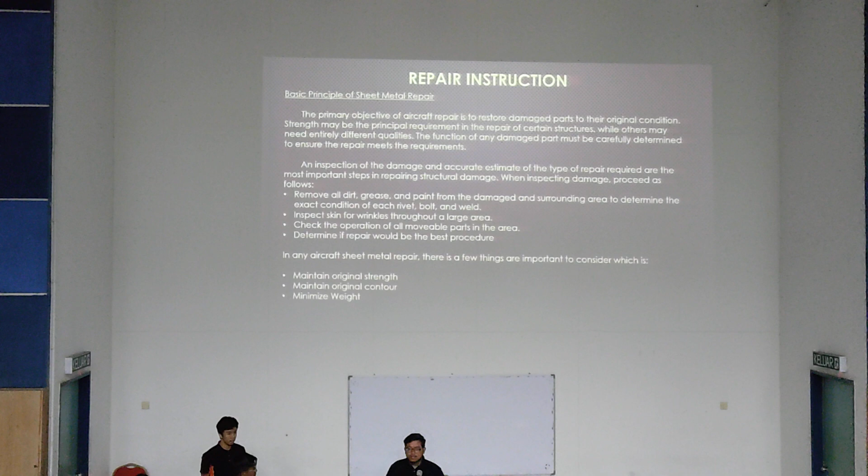So to determine the repair, you have a few things to consider. Firstly, the aircraft needs to maintain its original strength. Second, the aircraft needs to maintain the original contour or outline of the aircraft. Lastly, the repair needs to minimize its weight.

Okay, next, classification of the damage. First, the negligible damage. The negligible damage is damage considered visually apparent surface damage that does not affect the structure, such as small defects like a small dent.

Next, damage repairable by patching. Any damage that exceeds negligible damage, like excessive dent or excessive scratch, you need to make a patching. The third one is damage repairable by insertion. Damage must be repaired by insertion when the area is too large to be patched.

Assalamualaikum. So for the procedure there are three main parts. First we inspect the damage, and second we determine whether we need to replace the damaged part or not. In our case, we need to replace that part. After that, we continue with the installation. So there's one point that I want to highlight.